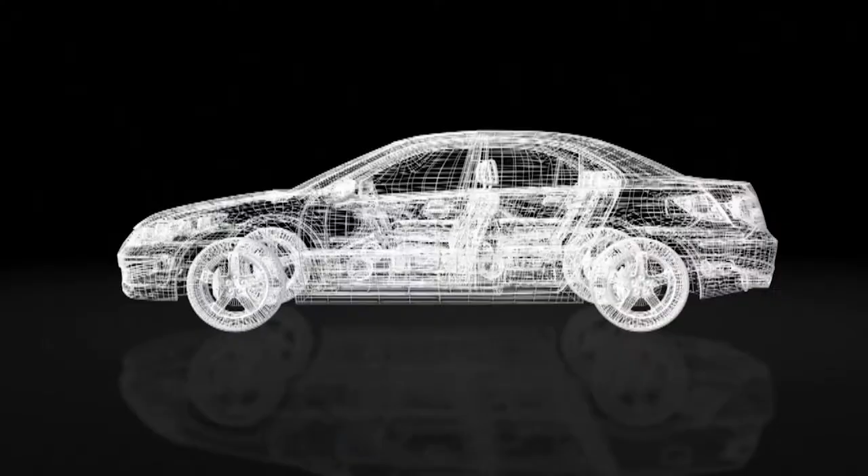Imagine you're an engineer. It's late in the day and you're already daydreaming about your well-deserved weekend when all of a sudden, I show up waving a last-minute ECO. The company that we're designing for, let's call them Acme, needs some major revisions to their part. And that might mean you'll be here all weekend.

I take a look at the ECO and to my surprise, while these changes are dramatic, I'm going to be able to get them done in a flash. You see, what Allison doesn't know is that all of these changes can be made fairly quickly if I just use Creo's flexible modeling platform.

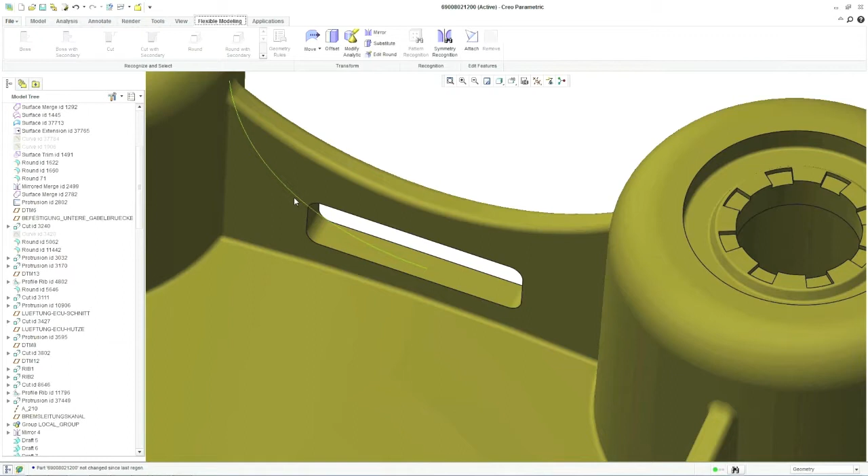So first things first, this wall here needs to be thickened and this round on top needs a larger radius. I'll pull this wall and set it. Now, I'll select the top round and pull it to create a larger radius. Hold on, there's one more thing. What's that? That wall also has to blend in with its base at an angle.

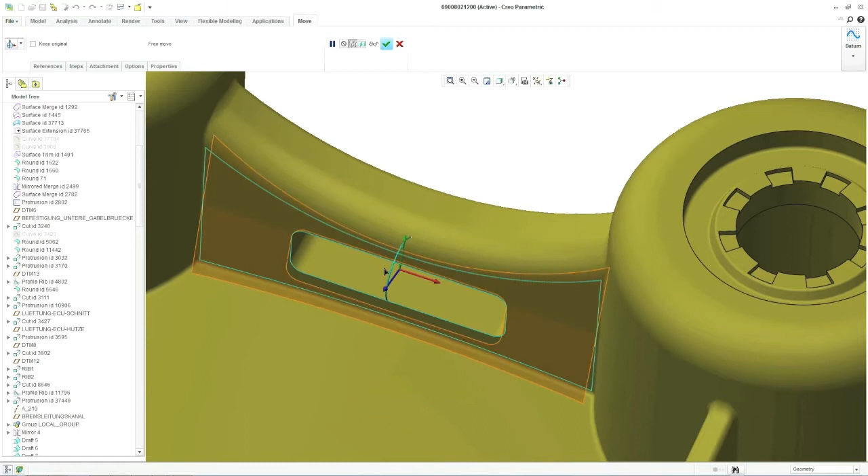No problem. Again, I'll just grab this wall and rotate it. And here's the cool thing, even my round is updated with the new geometry. Was that it? You're already done? Not quite. Because we modified the geometry of this hub, we're going to need to modify the sprocket that fits with it. Again, it's not that big a deal.

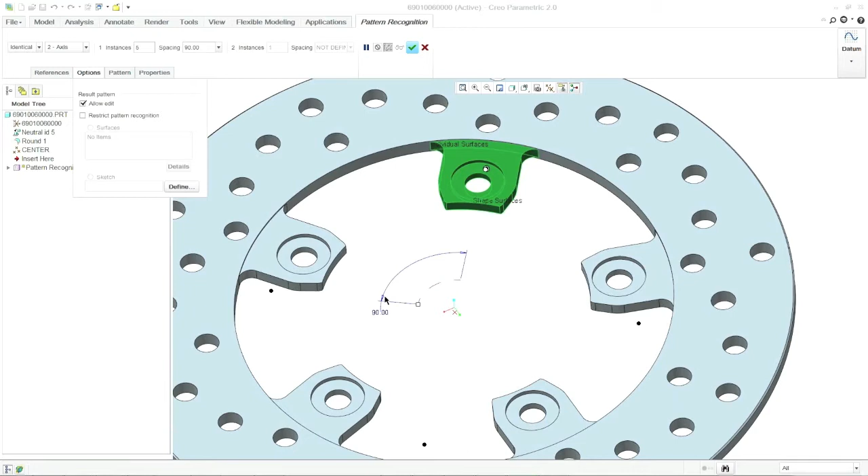I'm going to need to update the sprocket's connection pattern. So I'll select the connector and its rounds, and then I'll just increase the angular spacing between them. And there you have it. That ECO's complete. So what have we learned from that scenario, aside from the fact that we all value our weekends?

Well, the main takeaway is that before flexible modeling, engineers were often in quite a bind if late-stage design changes radically altered the geometry of a part. Because older modeling software relied solely on a parametric design approach, models could come crashing down if feature dependencies and constraints weren't meticulously unraveled before redefining geometry.

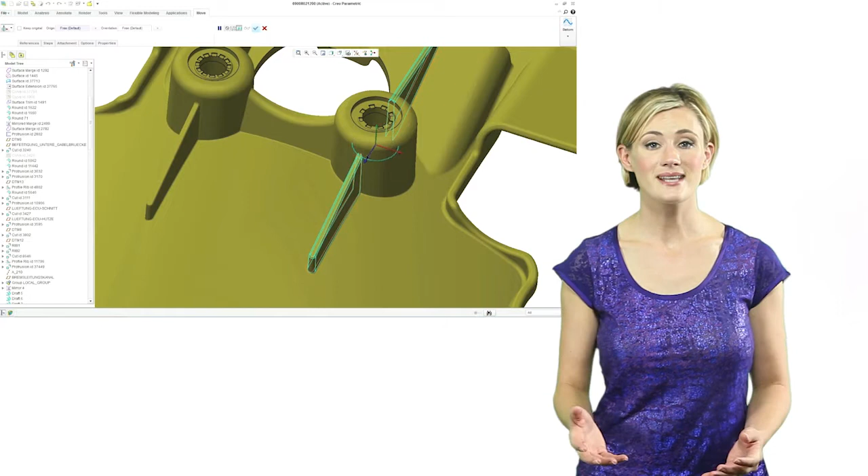By introducing a way to work directly on parametric models without knowing the history of the model itself, designers are free to make even the most dramatic changes to a part's geometry without fear of destroying the model as a whole. And as designers modify one feature, all of the features that intersect with it are updated to conform to the new changes. Once the changes have been made, the part can then be reintroduced to a parametric environment where they can be linked to existing geometry by using traditional feature dependencies and constraints.

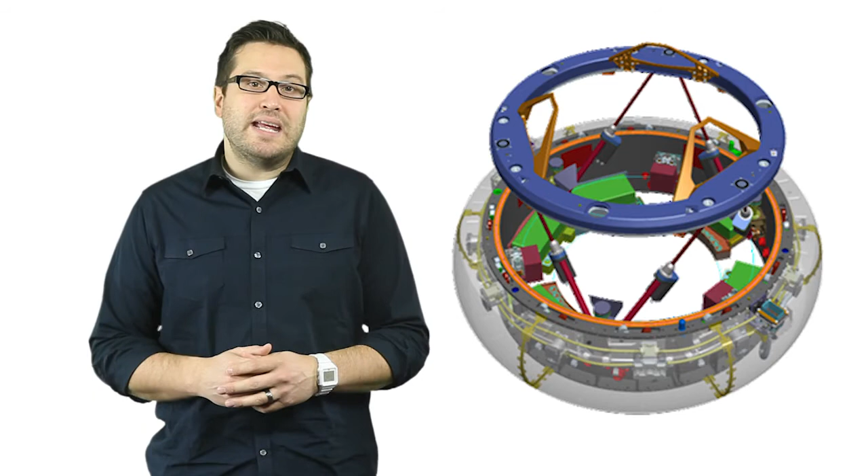So design flexibility is really about creating a seamless union between the rigid and safe world of parametric modeling and flexible world of direct modeling. In the end, design flexibility can save engineers time when making late-stage design changes, and that can make the difference between an order that's delivered on time and one that's not.